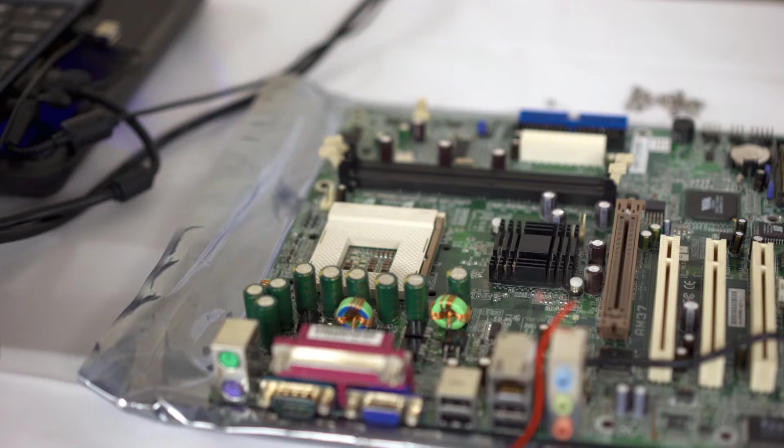In this session, we will analyze how to build several components for a PCB enclosure. The acronym PCB stands for Printed Circuit Board. Many consumer electronics use printed circuit boards, and they often must be assembled in some type of enclosure. The enclosure contains other important items such as fans, heat sinks, and sometimes buttons and connectors to allow the user to interact with the electronics inside.

In this exercise, we're going to create a few components for the PCB and modify the enclosure to allow for adequate ventilation. We'll start by creating 3 different size capacitors and placing them on the circuit board. This may sound time-consuming, but don't worry, we've got a great way to make this quick and easy. After that, we'll improve the design of the PCB enclosure by adding holes for ventilation. To increase airflow over the circuit board, some fans will be required, so we'll also be placing some mounting holes and creating cutouts for the fans.

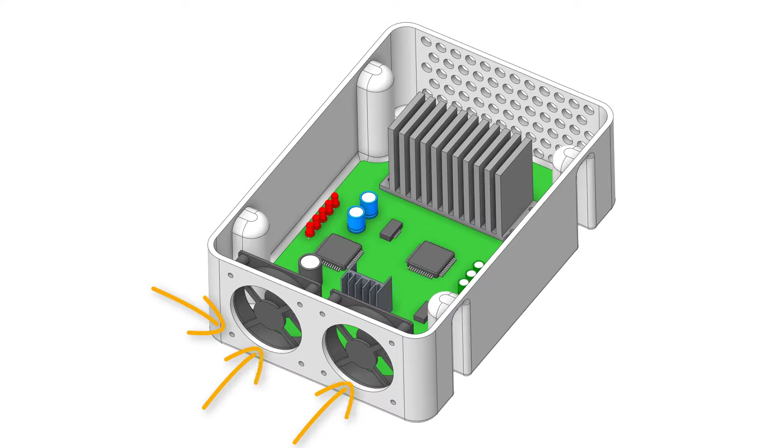We'll then design the fan housings and assemble them. Lastly, we'll assemble a heatsink and quickly alter the geometry to match existing components on the PCB. Let's examine the assembly to get an idea of how we can make the necessary changes.

Open the file labeled PCB exercise file. Look at the main model and rotate it around a bit, and note that the enclosure, which is the box that contains all of the circuitry, has no holes for ventilation. In the finished design, there would be a lid covering the top of the enclosure, so the current design isn't great. Press Ctrl 2 to orient the model in the front view. The circuit board looks a little bit empty.

Our first task is going to be to create some electrical components to add to the circuit board. Refer to Sheet 2 of the technical drawing. This drawing contains the dimensions to create a capacitor. A capacitor is a device that stores electrical energy in an electric field, usually in the gap between metal plates. If we examine the technical drawing, we can see that our capacitor doesn't have any internal structure, so we can think of it as being for display purposes only.

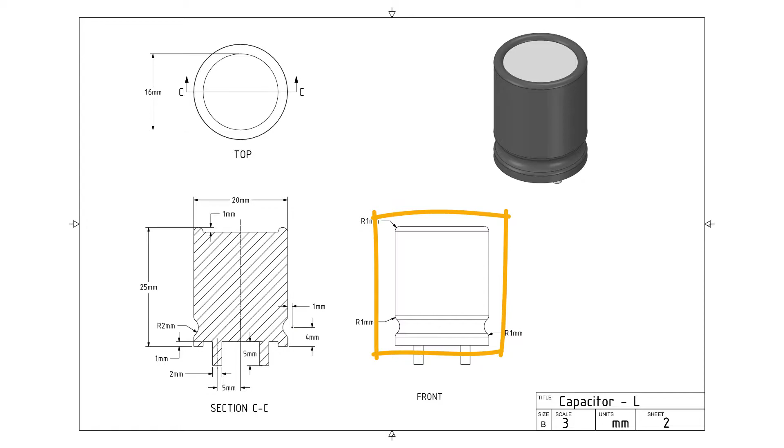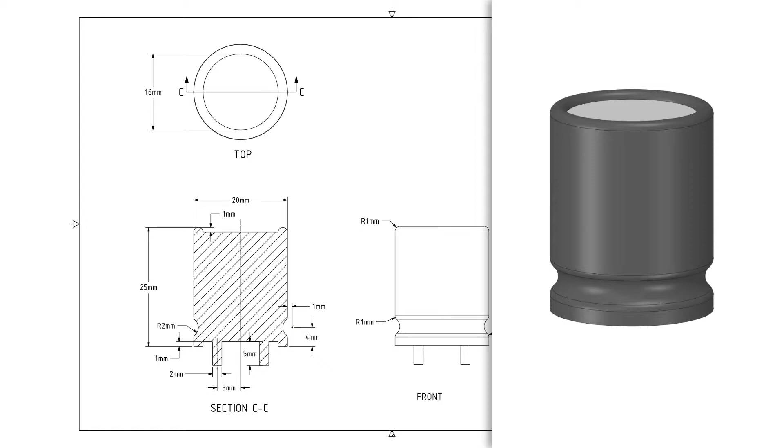This model is essentially a cylinder with a few minor modifications. It's generally advisable to create the bulk of a design in the first few operations, then add the finer details. Keeping that approach in mind, we can begin by creating the main cylinder. The groove near the base of the cylinder can be created with a revolved cut. Then, we'll add the depressions on the top and bottom faces and create the radius along the top circumference. The last step will be to add the 2 pins on the bottom of the capacitor.

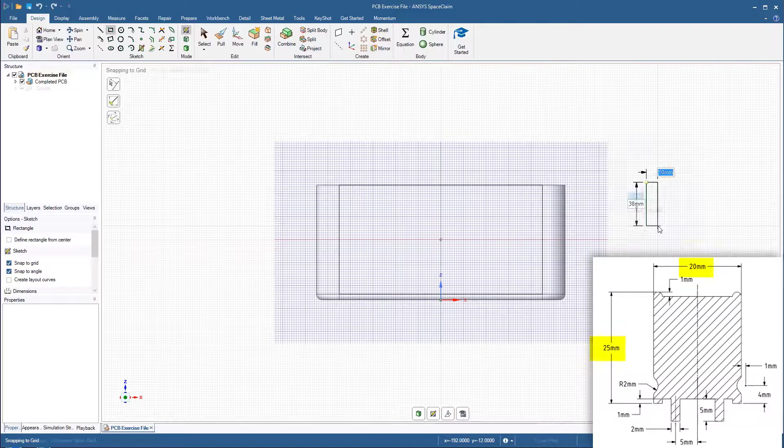To begin creating the capacitor, create a new sketch anywhere in the PCB exercise file. The orientation of the sketch is not important right now. The front face of the enclosure is a good place to start. Create a rectangle 25 mm high by 10 mm wide. Start the Pull tool and select the rectangular surface. Click the Revolve option and select one of the long edges of the rectangle as the axis to rotate about. Then press Enter. This operation should create a cylinder with a diameter of 20 mm and a height of 25 mm.

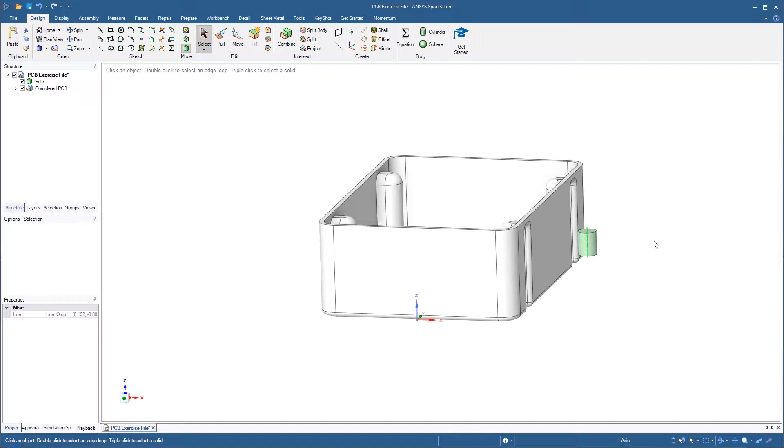Move the mouse cursor over the cylinder and select the dashed center axis. Then create a sketch. The sketch plane should pass through the center of the cylinder. Select the Circle Sketch tool. Then move the mouse cursor to one of the bottom corners of the cylinder and tap the Shift key. Place a circle with the center point 4 mm up from the bottom and 1 mm outside the cylinder. Set the diameter to 4 mm.

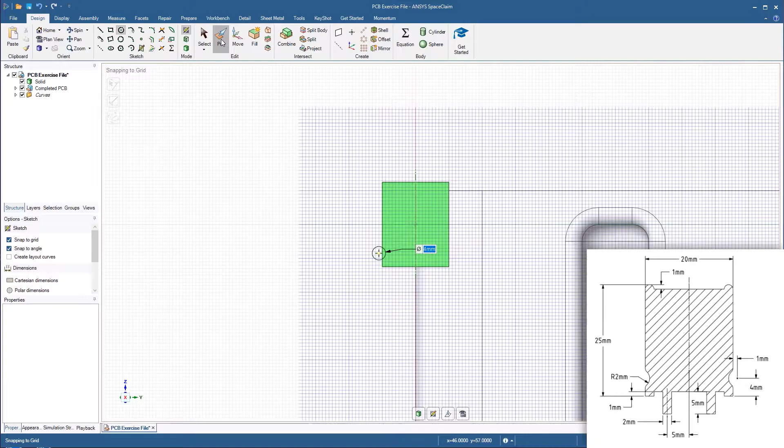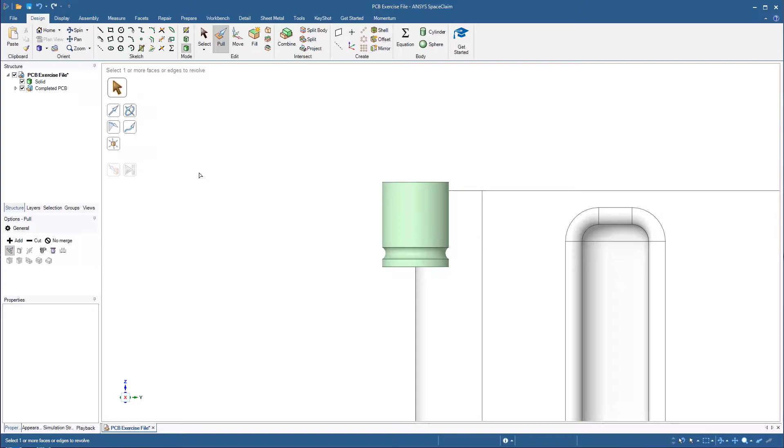Start the Pull tool and select the circular face. Select the Revolve tool again and select the same axis of the cylinder. This time, select Cut from the Pull options on the left side of the window and click Full Pull to cut a groove around the base of the cylinder. Click anywhere in the background to revert to the basic pull function. Then hold Ctrl and select the top and bottom edges of the groove. Use the Pull tool to apply a 1 mm radius. Press S on the keyboard to exit the Pull tool.

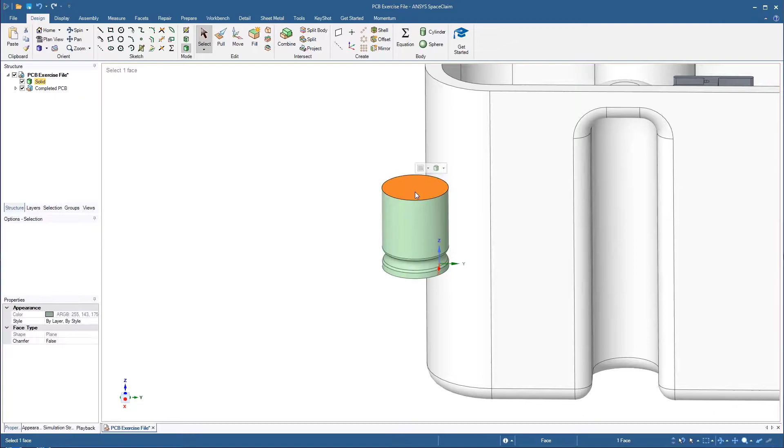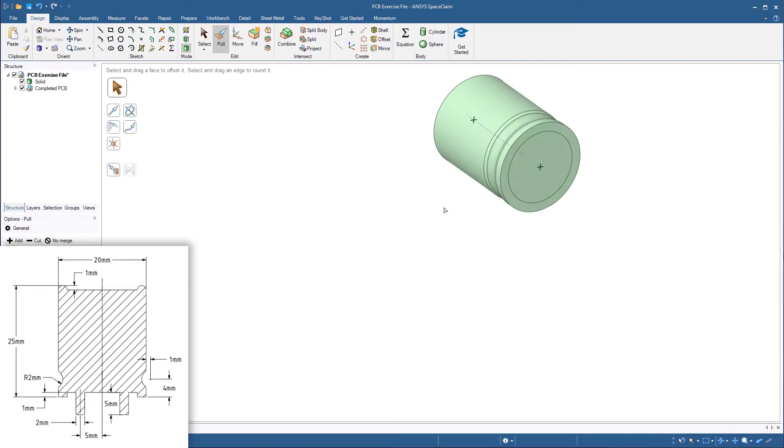Create a new sketch on the top face of the cylinder. Sketch a circle with a diameter of 16 millimeters. Place the center point at the center of the circular face. Repeat this process on the bottom face of the cylinder and use the pull tool to create a 1 millimeter depression on each face.

Hold Ctrl and select the two edges at the top of the cylinder. Use the pull tool to create a full round. You can create a full round by clicking and dragging slightly to begin adding a radius, and then moving the mouse in the opposite direction. If done correctly, the two edges should be rounded into one continuous arc.

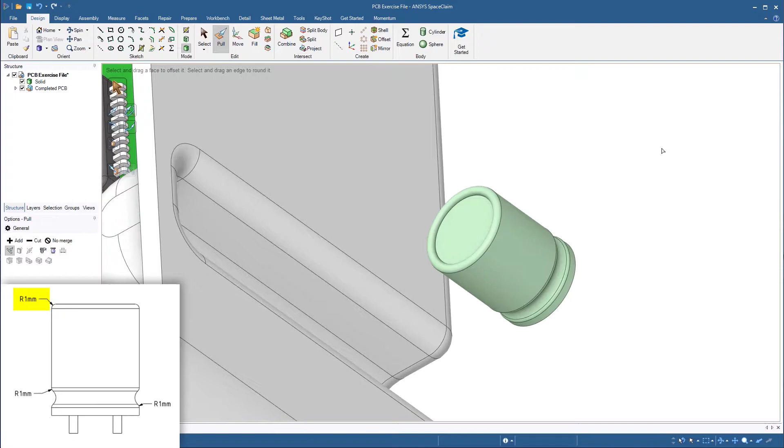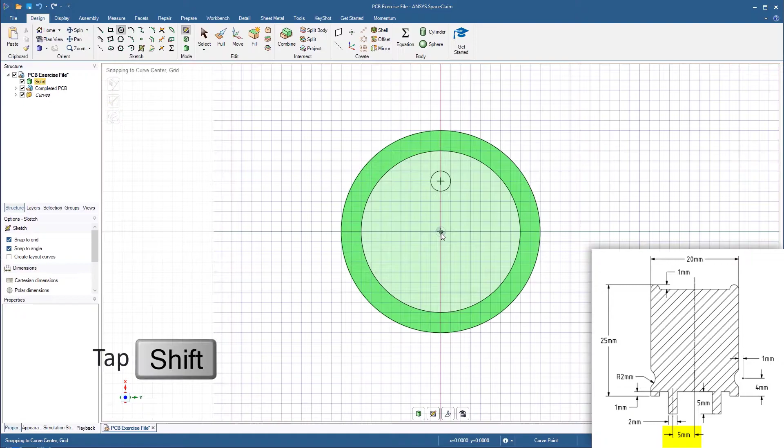Now, we need to create the pins at the bottom of the capacitor. On the bottom face of the cylinder, sketch two circles, each with a 2 millimeter diameter. Place one circle 5 millimeters up from the center and the other circle 5 millimeters down. Pull both profiles 5 millimeters to extend them and create the pins.

We're now going to duplicate the solid body using Move Copy. Start the Move tool and select the body. Then hold Ctrl and click and drag the Move tool in any direction. Click and drag again to create a second duplicate.

The completed assembly has 3 different size capacitors. We can create these quickly using the Scale option within the Pull tool. Click Pull and select the Scale Body option. Locate the world origin and select it as the anchor point. This is a point that will remain fixed as the rest of the body is scaled larger or smaller.

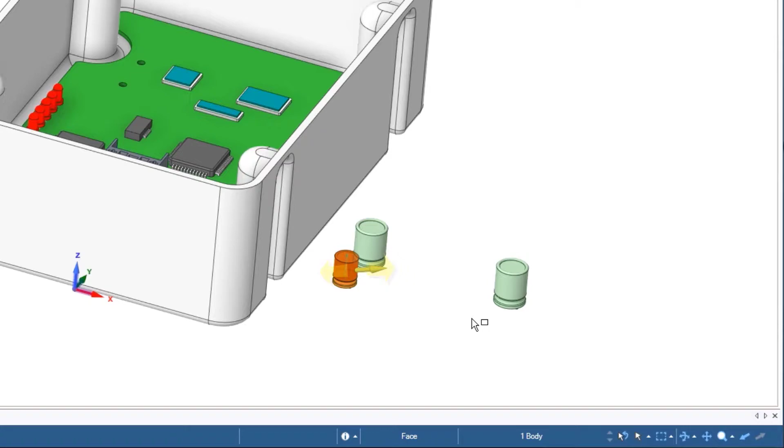Click and drag a box around the second capacitor. Enter 0.75 as the scaling factor. This new capacitor is 25% smaller than the original. Notice how the capacitor moved some distance toward the world origin. Repeat this process to create another capacitor that is half the size of the original. Use 0.5 as the scaling factor.

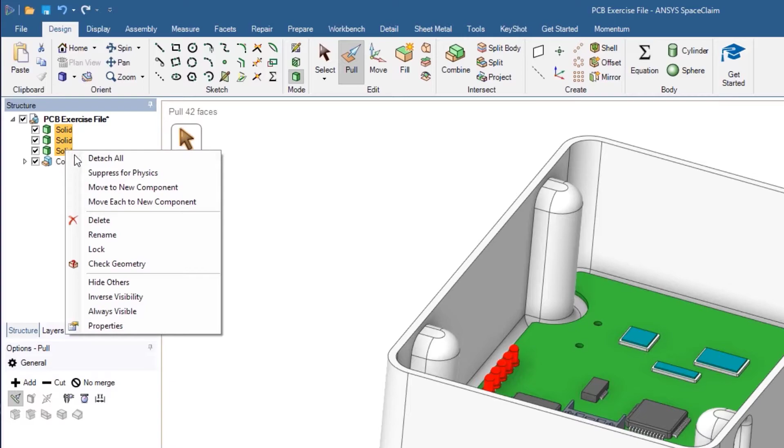Select the 3 solids from the structure tree, then right-click and select Move Each to New Component. Change the name of all 3 components to capacitor, and then add the size at the end of the name. It would suffice to add L, M, or S to differentiate between large, medium, and small.

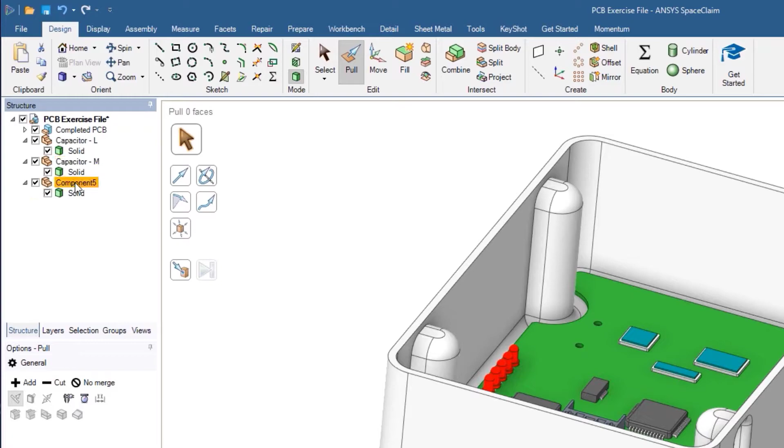Use the Move tool to place the capacitors anywhere on the circuit board, but avoid the area near the 3 components furthest from the world origin. Select a capacitor from the structure tree, then use the move handles to translate it along the X and Y directions.

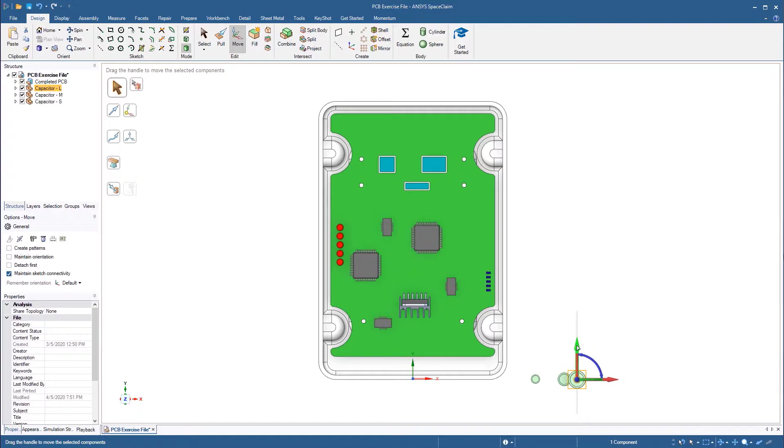Click the Anchor button and select the bottom edge of one of the pins. Select the Up To option and click the top surface of the circuit board to snap the capacitor to that position. Repeat this process for the remaining capacitors.

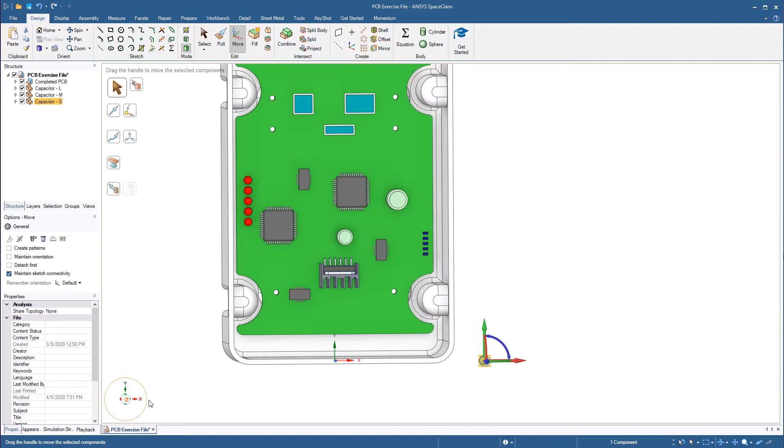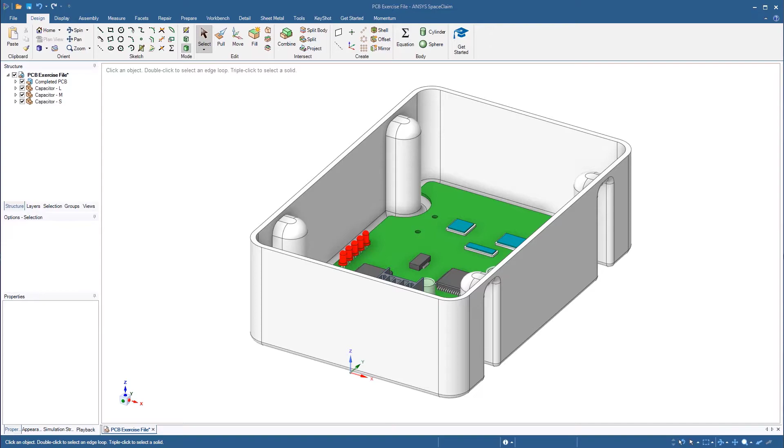Now, we're going to make some changes to the PCB enclosure housing to allow for adequate ventilation. The fastest way to create several duplicates of an item is by using the Pattern tool. The next step is to create a series of holes in one face of the model. Click the tab labeled Views below the structure tree. Then, double-click the view labeled Back. The model should automatically reorient in the window to look at the back face of the enclosure.

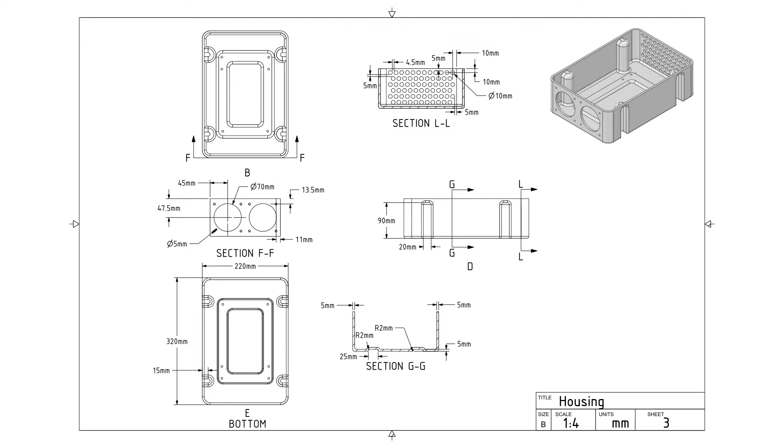If we refer to Sheet 3 of the technical drawing in the view labeled Section LL, we can see the dimensions for the placement of the first hole in the pattern. The placement of the first instance in a pattern is the one that's most important. Create a sketch on the back face of the enclosure housing. Start the Circle tool and create a circle with the center point 10 millimeters from either the left or the right edge of the face and 10 millimeters down from the top.

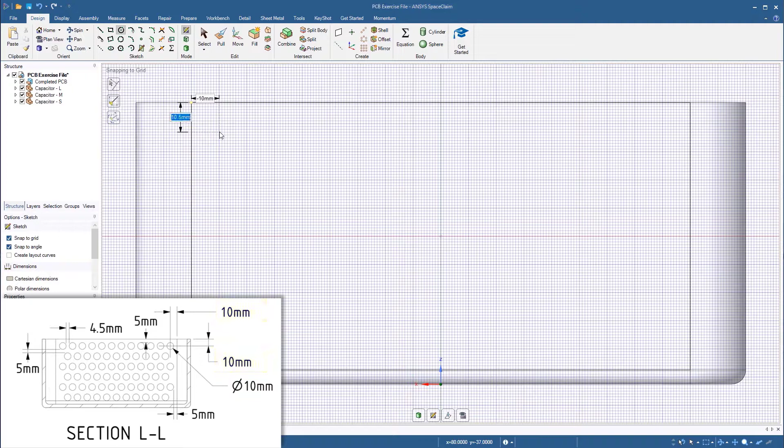Make the diameter 10 millimeters, then start the pull tool. Pull the circular profile in the opposite direction of the yellow arrow to cut a hole. Press S on the keyboard to exit the pull tool. Select the surface on the inside of the hole and start the Fill Pattern tool.

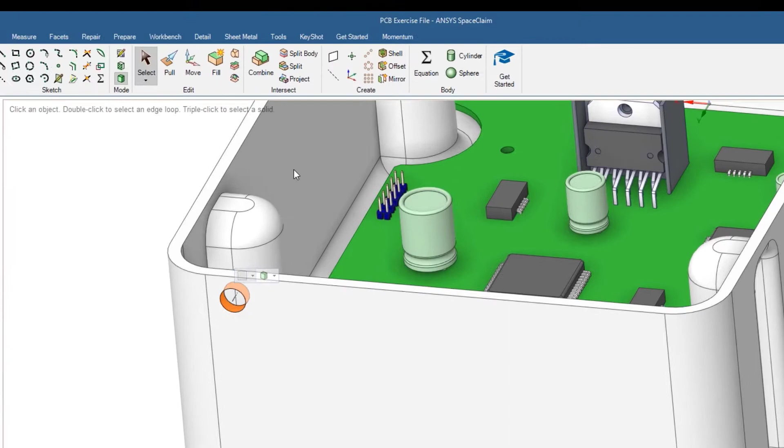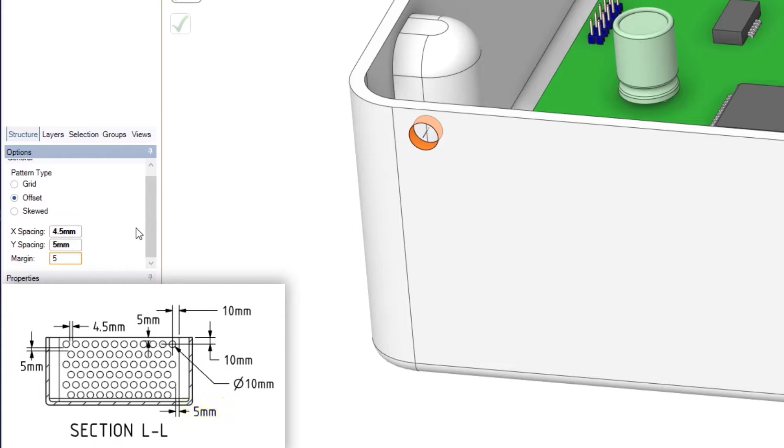In the Options panel on the left side of the window, set the pattern type to Offset and make sure that the hole is selected as the object to pattern. Set the X spacing to 4.5 millimeters, the Y spacing to 5 millimeters, and the margin to 5 millimeters as well. Click any edge of the housing as the direction reference, then click the green check mark to complete the pattern.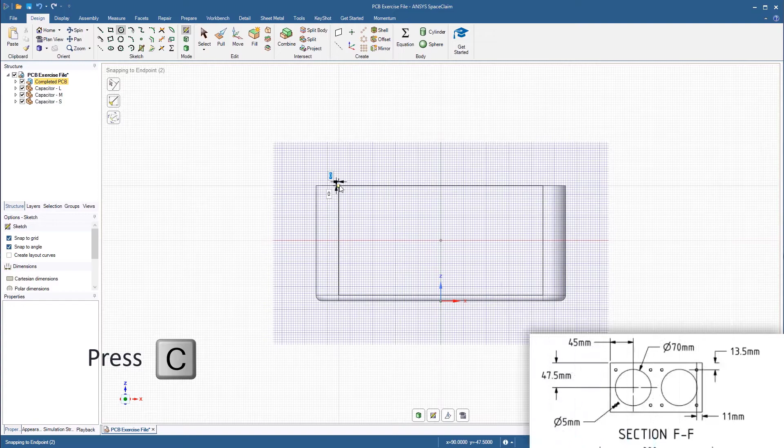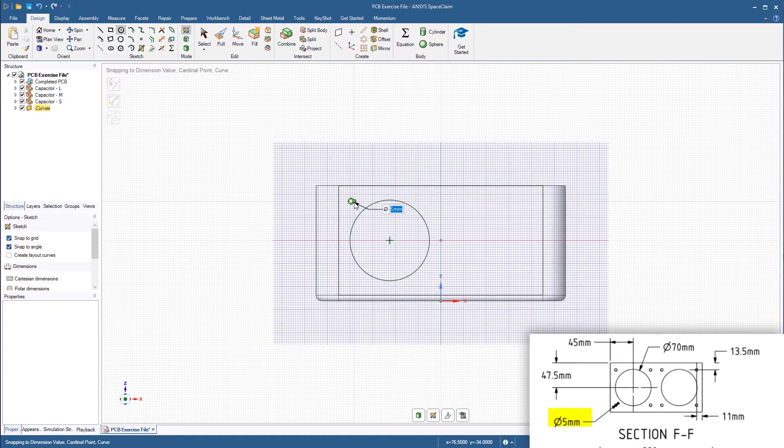Rotate the model to the front view and create a sketch on the front planar face. Place a circle with the center point 45 millimeters from the left edge and 47.5 millimeters from the top edge. Set the diameter to 70 millimeters. Sketch another circle 13.5 millimeters from the top edge and 11 millimeters from the left edge. Set this diameter to 5 millimeters. Create another 70 millimeter circle, but this time use the same dimensions to offset it from the right edge instead of the left.

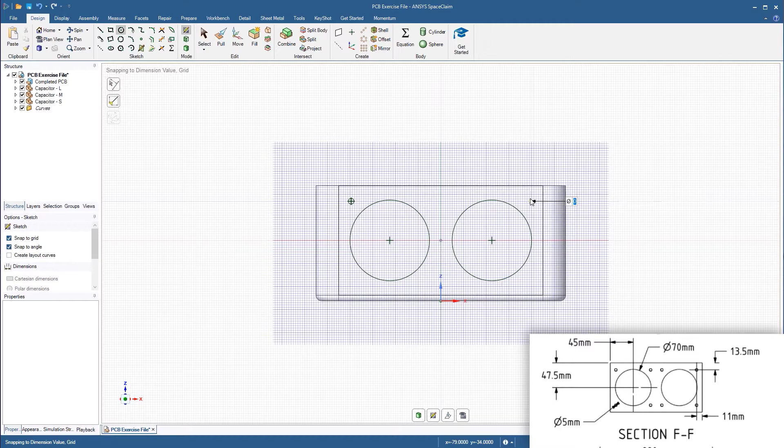Do the same for the small 5 millimeter circle. Start the pull tool and cut all 4 holes out of the enclosure housing wall. Remember to hold Control to select multiple items.

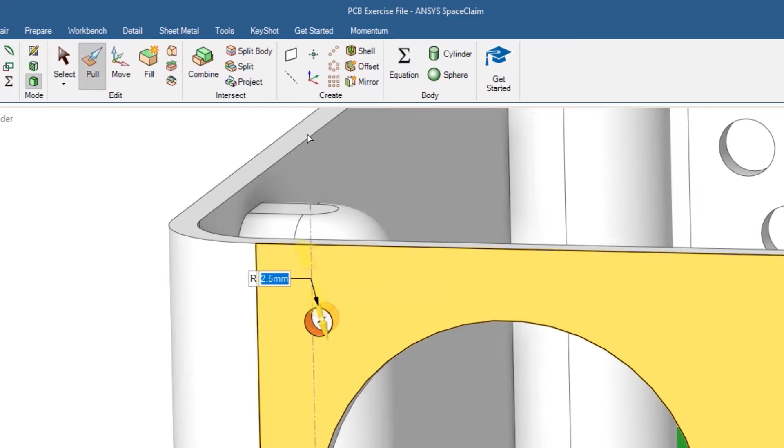Select one of the small 5 millimeter holes, then click the Circular Pattern tool. Click the edge of the 70 millimeter hole to define the center axis as the axis to pattern about. Make sure the circular count is set to 4 and keep the angle set to 360 degrees so the 4 holes are spaced evenly. Click the green check mark to complete the pattern.

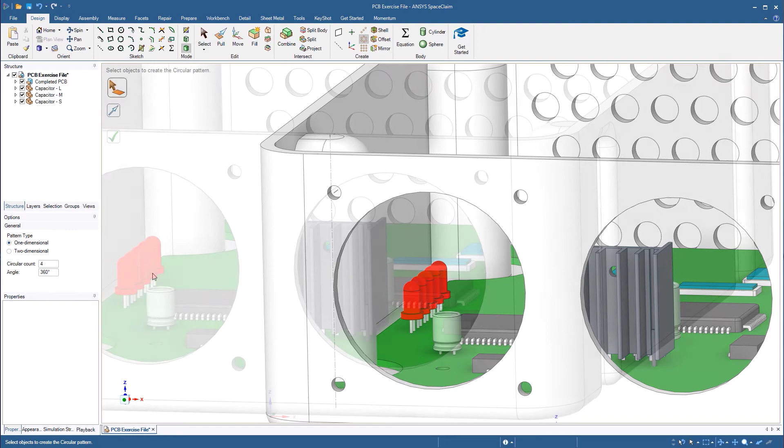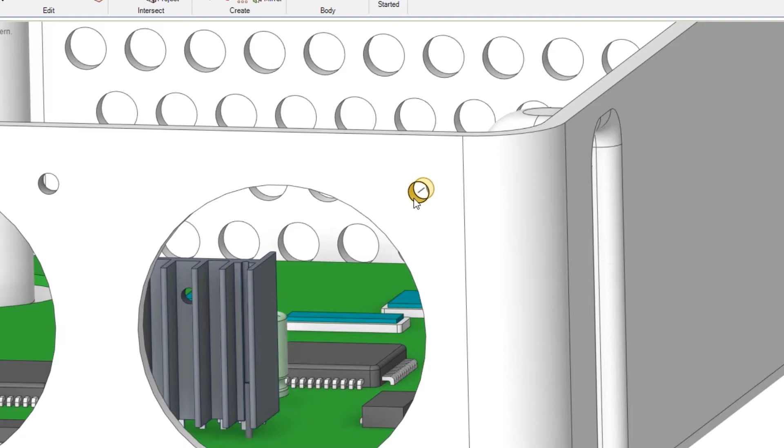Use the Query Select function to select the 5 millimeter hole on the opposite side of the face. You can do this by moving the mouse cursor over the hole and rolling the mouse wheel. If you're using the mouse wheel to zoom, you will need to hold Control while rolling the wheel. Once the hole is highlighted, click to select it. Pick the edge of the 70 millimeter hole again to define the axis, and click the green check mark to complete the pattern.

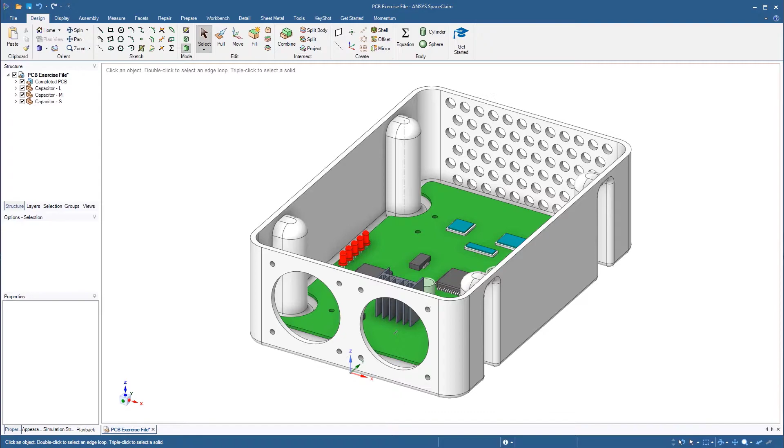We should now have the 2 70 millimeter holes for the fans and 8 5 millimeter holes where the fans will be mounted. The last items we need to add to this model are the fans themselves. For this exercise, we're only going to focus on creating the housing of the fans and not the fan blades or the motors. The dimensions for the fan housing can be found on sheet 4 of the technical drawing. The general shape of the fan housing is a square body. We can begin by creating the solid block.

We'll need to be clever to create the front and back faces of the fan housing. First, we should create the 4 cutout areas that pass through the entire block. We can then pull a circular profile to remove the material between the front and back faces and create the space required for the fan itself. The next items to add are the rounded corners and mounting holes. Once these have been placed, we'll remove excess material using the shell tool. The last feature will be the chamfer applied to the outer edges of the main cylinder.

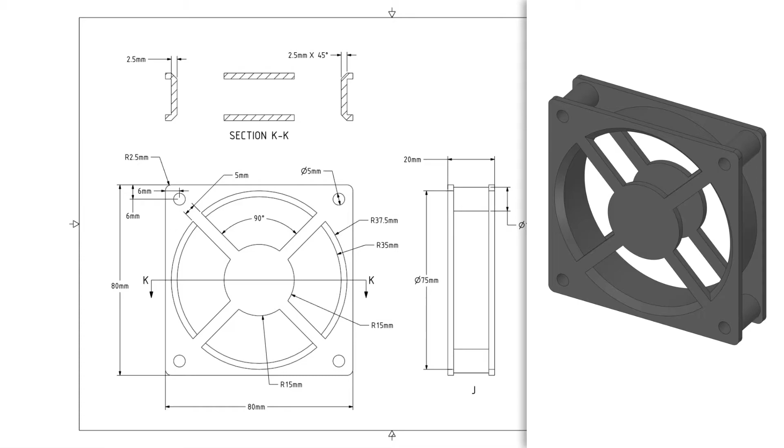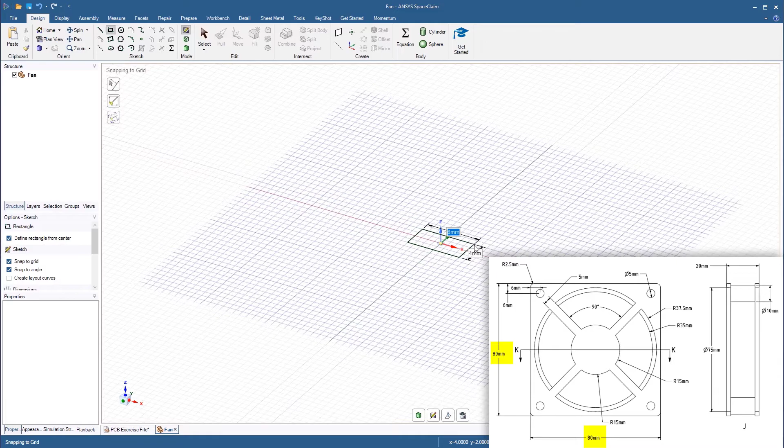Right-click PCB exercise file in the structure tree and select New Component. Name the component Fan. Right-click the new component and select Open Component. Using the default sketch grid created on the XY plane, click the Rectangle Sketch tool and select Define Rectangle from Center. Sketch a square that's 80 mm by 80 mm. Start the Pull tool and extrude the profile 20 mm.

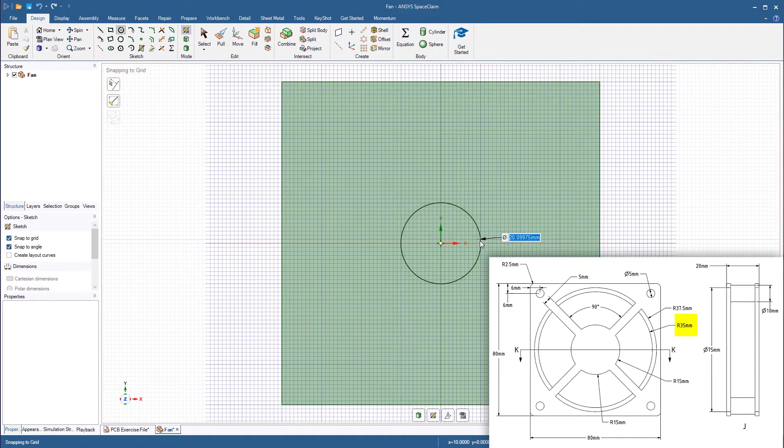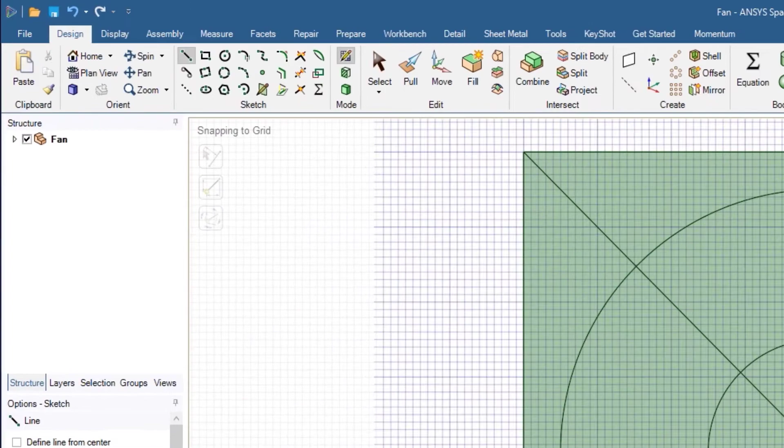Click the Circle Sketch tool and sketch a circle 70 mm in diameter in the center of the front face. Sketch a second concentric circle 30 mm in diameter. Sketch lines from the center point to each corner of the square face. You can double-click at the end of a line segment to begin a new segment elsewhere. Select the Offset Curve tool and enable the option Offset Both Ways. Offset each of the lines by 2.5 mm. The total width between the new offset lines should be 5 mm.

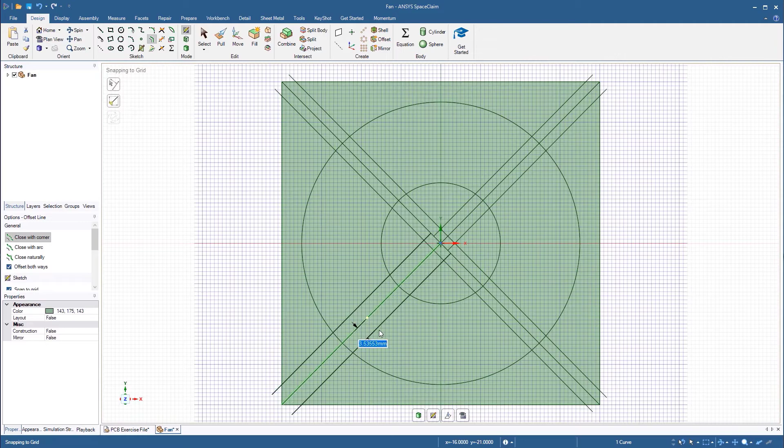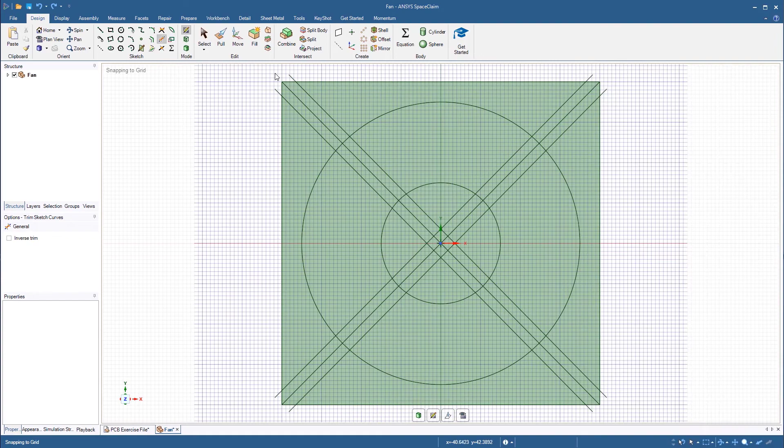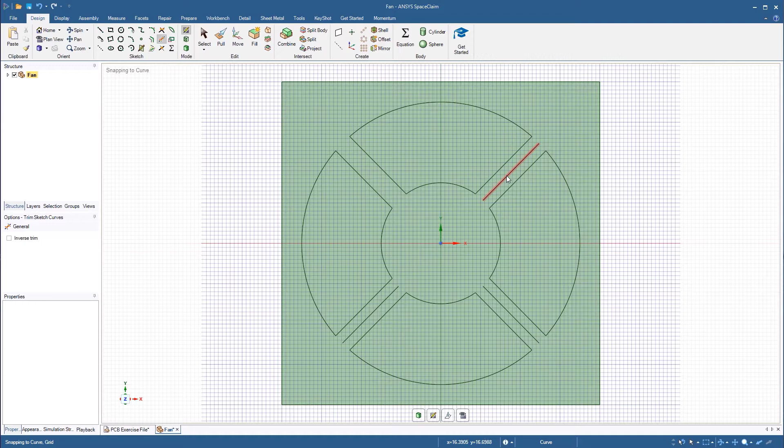Use the Trim Away tool to eliminate all line segments beyond the 70 mm circle and within the 30 mm circle, including the portions of the circle perimeters within the 5 mm offset lines. Refer to Sheet 4 of the technical drawing to see how the fan should look. Pull the 4 profiles all the way through the block to cut the material.

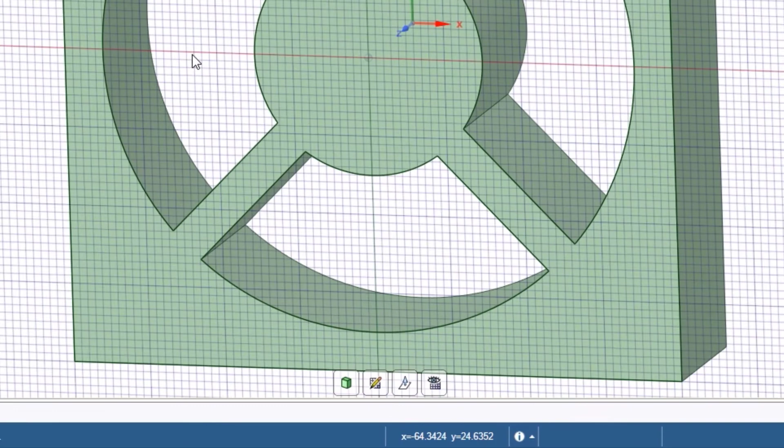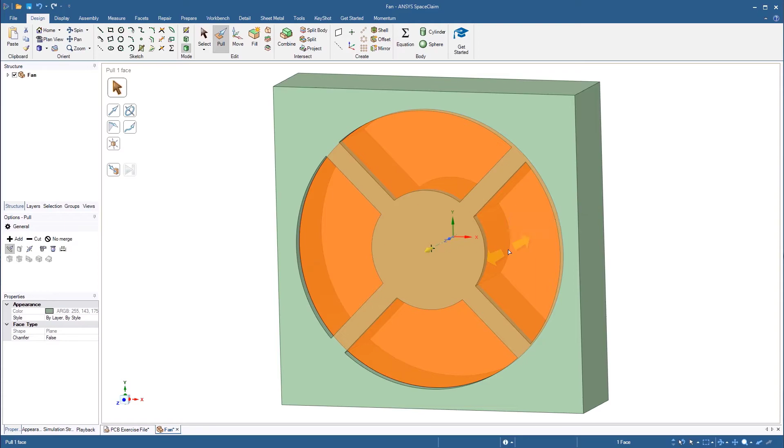Create a sketch plane on the front face of the fan. Then use the Move Grid button to offset the sketch grid -2.5 mm in the Z direction. Sketch a 70 mm circle in the center of the face. Start the Pull tool and pull this circular profile -15 mm. The remaining faces at the front and back of the fan should each be 2.5 mm thick.

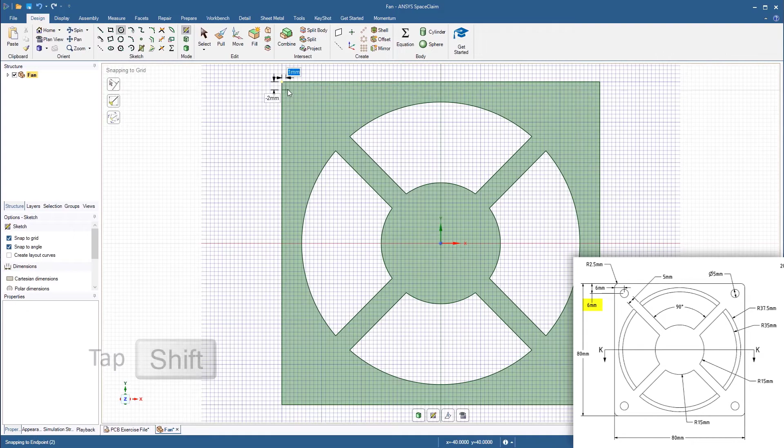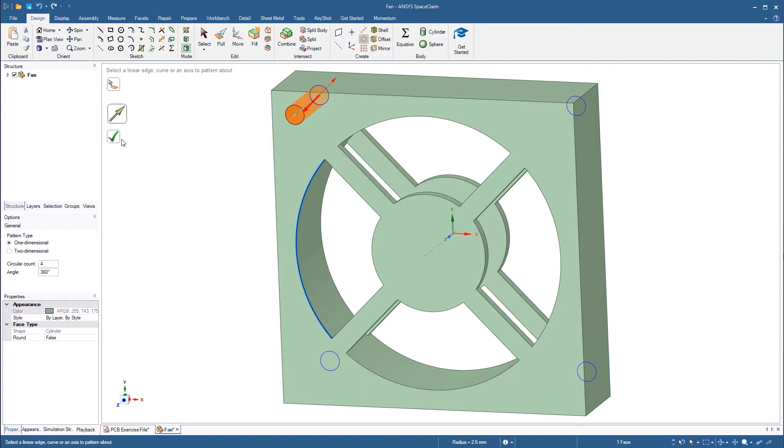Create a new sketch on the front face of the fan. Click the Circle Sketch tool and place a 5 mm diameter circle with the center 6 mm from the top edge and 6 mm from the left edge. Pull this circular profile through the entire fan body to cut a hole. Use a circular pattern to place a hole at each corner. Select an edge of the 70 mm hole to define the axis to pattern about. Using the Pull tool, add a 2.5 mm radius to the outside corners of the fan housing.

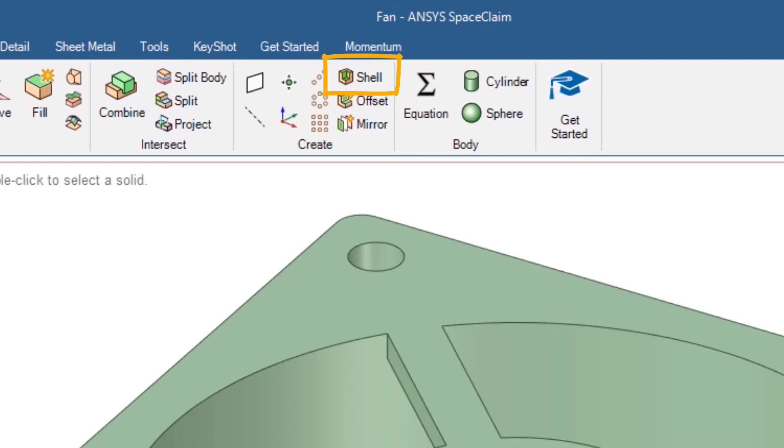Now that we've defined the primary features of the fan housing, we can perform an operation to remove excess material. For this operation, we'll use the Shell tool. The Shell tool can be used to remove material from within a body. The most basic application of the Shell tool is to create a fully enclosed, hollow body. But the Shell tool can also remove selected faces, providing an opening to the interior of the body. We're going to use the Shell tool to give the fan a uniform thickness and reduce the amount of material required to make the fan housing.

We're going to be removing the faces on the top, bottom, left, and right. Click the Shell tool and move the mouse cursor over any part of the fan. Type in 2.5 mm to set the thickness for the shell operation. Now, click each of the side faces on the fan housing.

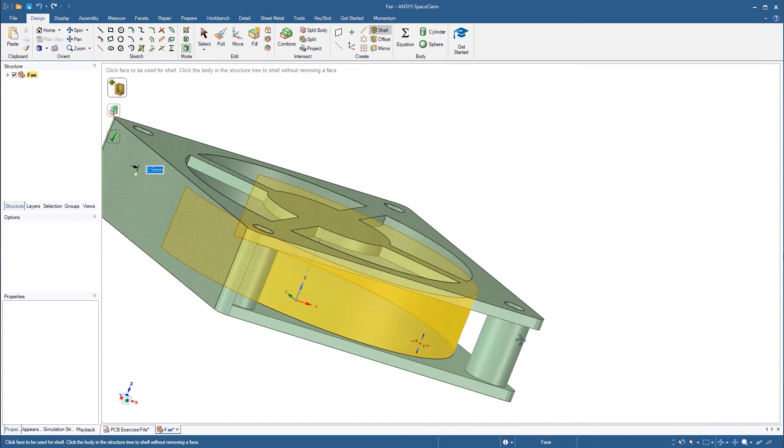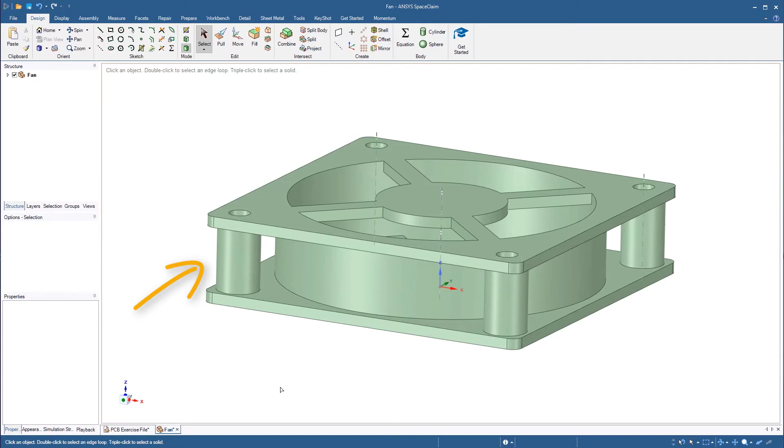When only 2 faces are left to be removed, make sure to select the radius corner first to remove it. Then remove the final planar face. You should now be able to see the cylinders that define the outside of the holes and the location of the fan. The last feature that remains to be added is the chamfer on the edge of the 70mm hole.

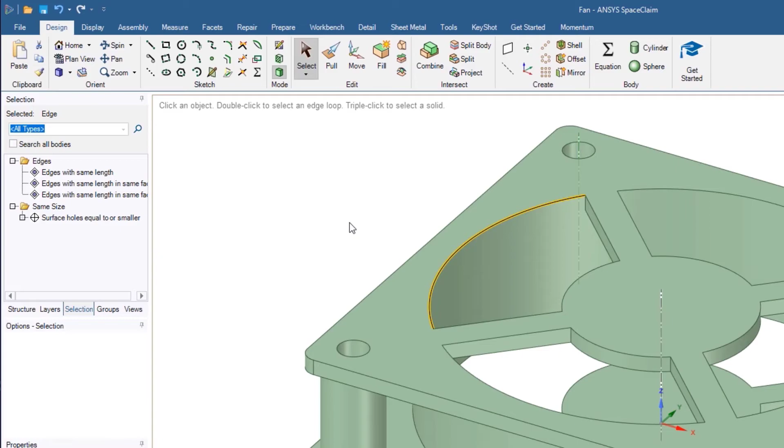Click the Selection tab beneath the structure tree. Then select one of the arc edges on the 70mm hole. The selection tool should present you with several criteria. Click Edges with Same Length. The edges of all 8 arcs should now be selected.

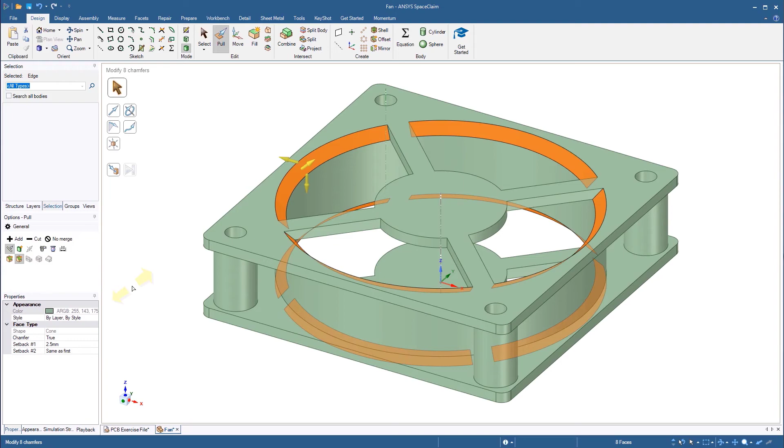Start the Pull tool and select the chamfer option from the Options panel on the left of the window. Enter a value of 2.5 and press Enter. The fan housing is now complete. Close the tab from the bottom of the window to return to the PCB exercise file. The fan should now be present within the larger assembly.

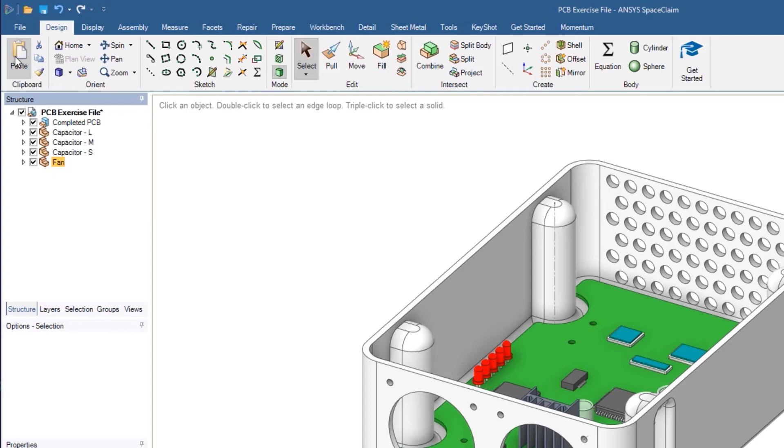Right-click PCB exercise file and select Activate Component. Select the fan in the structure tree and then click Copy and Paste from the toolbar. This creates a duplicate of the component. With one of the fans selected, use the Move tool to reposition it away from the other fan.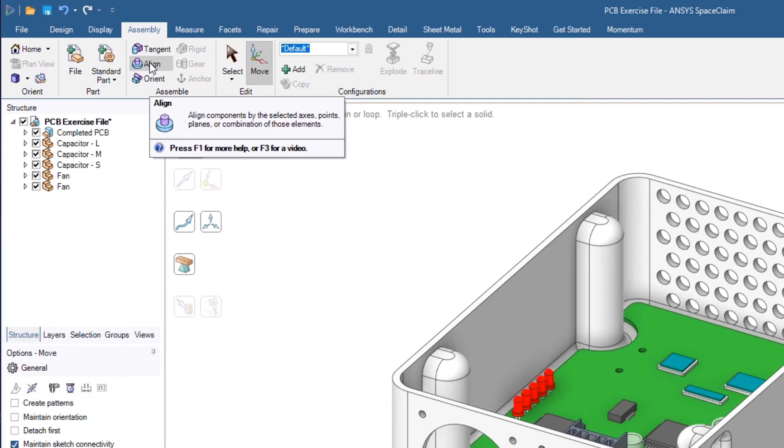Click the Assembly tab and use the Align constraint to place the fans in their appropriate positions. Remember that to be fully constrained, a component typically requires 3 assembly constraints. For the fan, you should be able to align the large center hole to the large cutout in the enclosure housing wall, and then align one of the small 5mm holes to its counterpart on the housing.

The last constraint should be to make the front face of the fan coincident with the inside face of the enclosure housing wall. Repeat this process for the second fan.

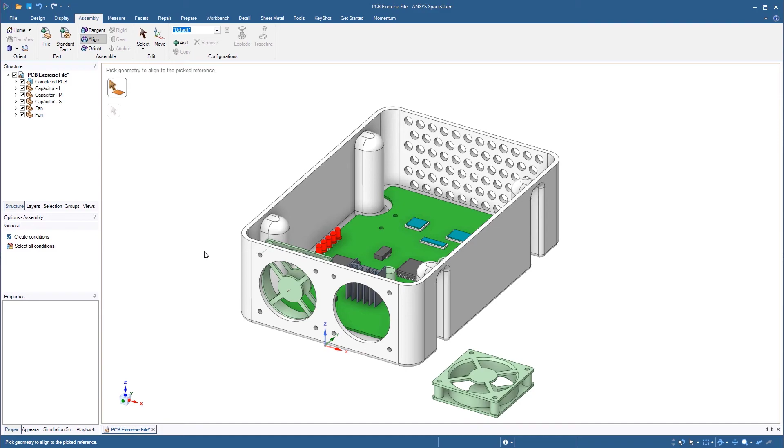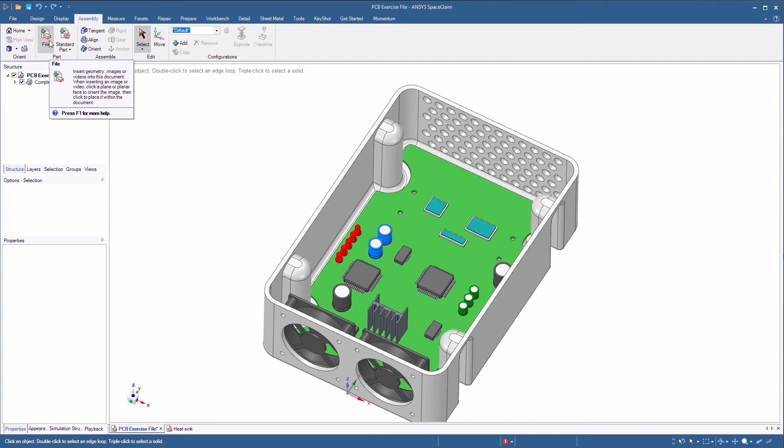Now that we've finished creating and placing most of the PCB components, we have one final item to add. The processors in this enclosure are going to require additional cooling because they generate a lot of heat. Click the Assembly tab and select the File button. Locate the heatsink and open it. Move the heatsink up some distance in the Z direction to get a better view of it. Hide the PCB enclosure from the structure tree and rotate the model.

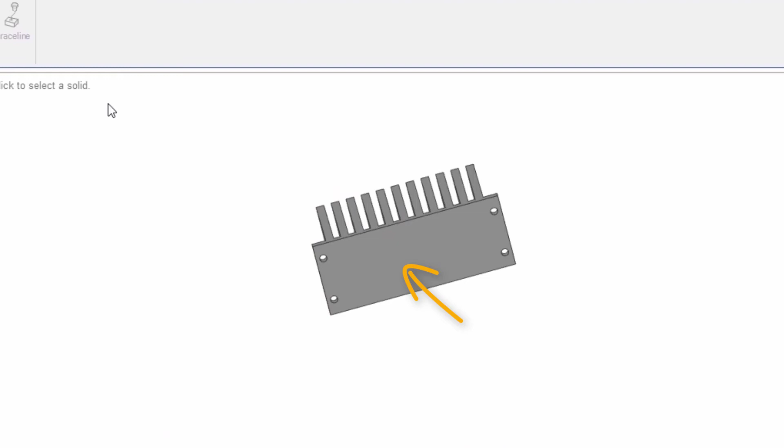The heatsink that has been provided for us can be thought of as a generic design. If we look at the underside of the heatsink, we can see that it's just a flat surface. There are no existing cutouts for the CPU components that are already assembled. We'll need to make some modifications in order for the heatsink to fit on this particular circuit board. Fortunately, we have some very useful tools at our disposal. Our approach in this scenario will be to assemble the heatsink in its final location, then use the Combine tool to remove the material that overlaps with the CPUs. Let's get started to see how this is done.

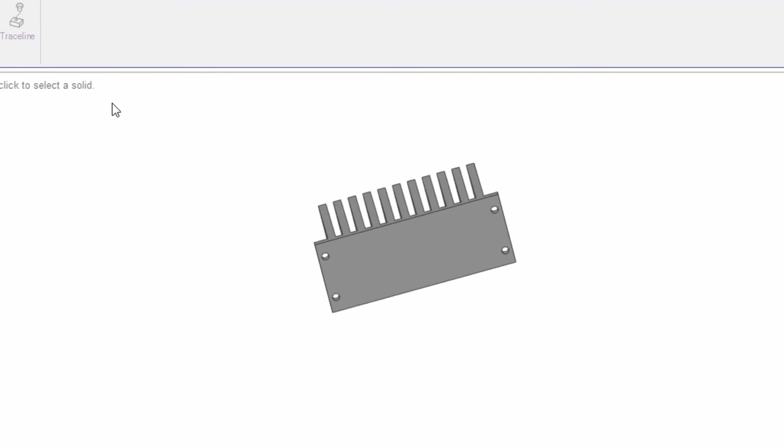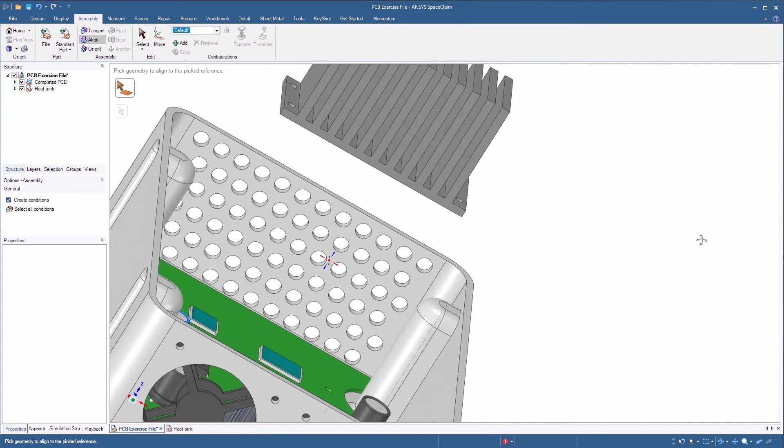Display the PCB enclosure again and go back to the Home view. Select the Align condition from the Assembly tab and zoom in to select one of the holes on the heatsink. Select the corresponding hole on the circuit board and repeat this process for the second hole. Now align the bottom face of the heatsink with the top face of the circuit board. This should move the heatsink into its final location. We're now ready to create the cutouts for the CPUs.

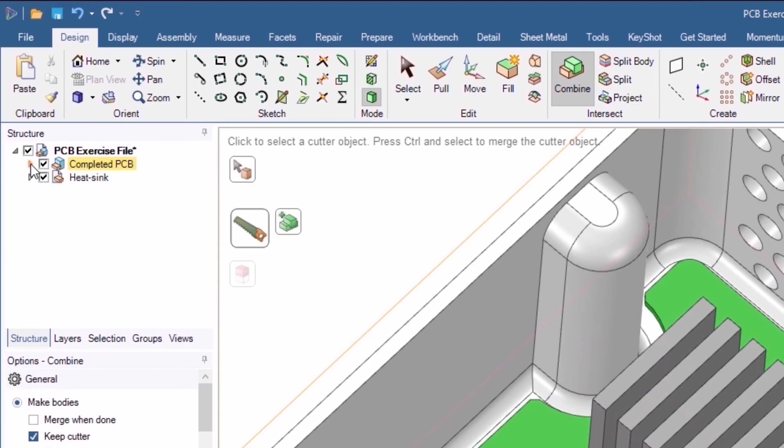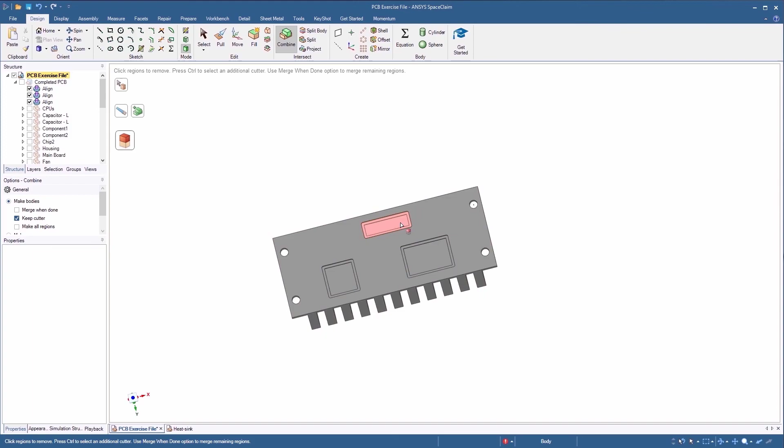Go back to the Design tab and start the Combine tool. Select the heatsink as the target object. In the structure tree, expand the Completed PCB assembly and locate the component labeled CPUs, then select it. Hide the PCB enclosure from the structure tree again and rotate the model to the bottom. With the Combine tool still active and the Select Regions to Remove option active, select the 3 cutouts in the bottom of the heatsink. This will remove the excess material.

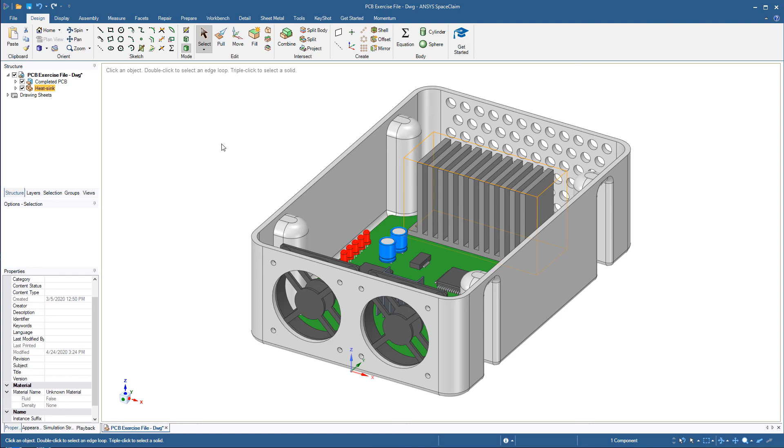Click Select to exit the Combine tool, then unhide the PCB enclosure and press H to return to the home view. Once the heatsink has been imported and assembled in its proper location, right-click the heatsink entry in the structure tree and go to Source, use Internal Copy. This will copy the geometry of the heatsink component from the external file and save it with the rest of the assembly in a single file. Congratulations, you've just completed the design of the PCB enclosure.